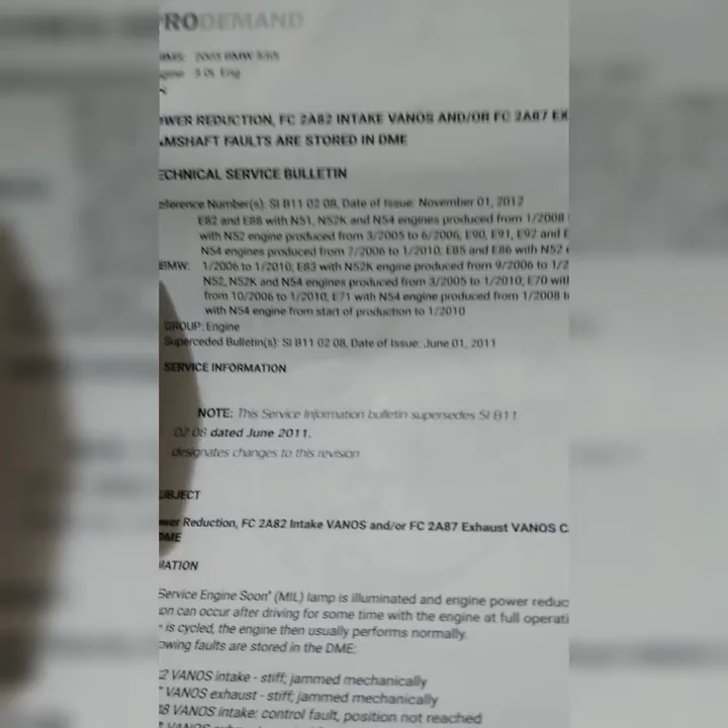My experience with this BMW 530i: basically the VANOS, I took them out, I cleaned them, and what I found was that in the middle of the diagnosis, I'm looking at the technical service bulletins and everything, and what I found was that the filter housing did not have its cartridge, the cartridge holder, thus making the VANOS turn on. I'll show you guys a technical service bulletin later. This is a technical service bulletin for this type of problem. You can see here, intake VANOS, blah blah blah.

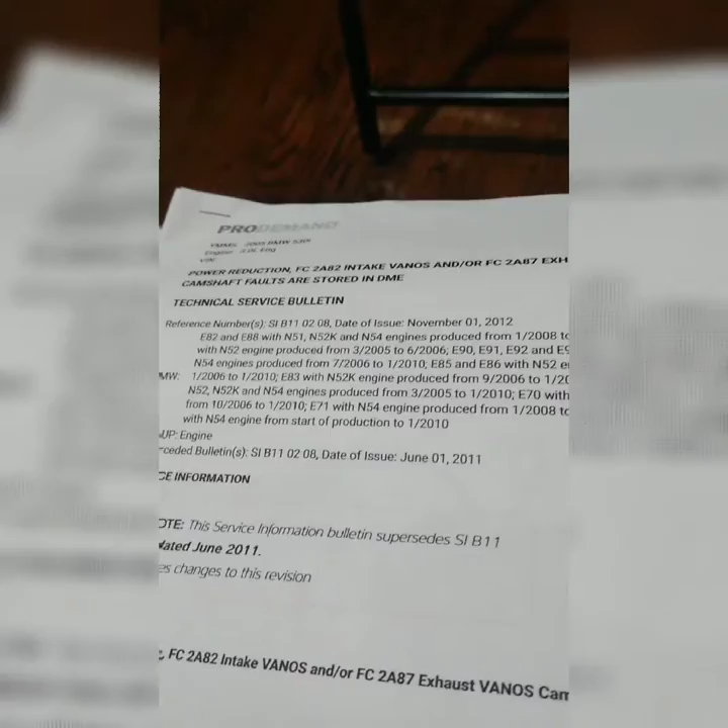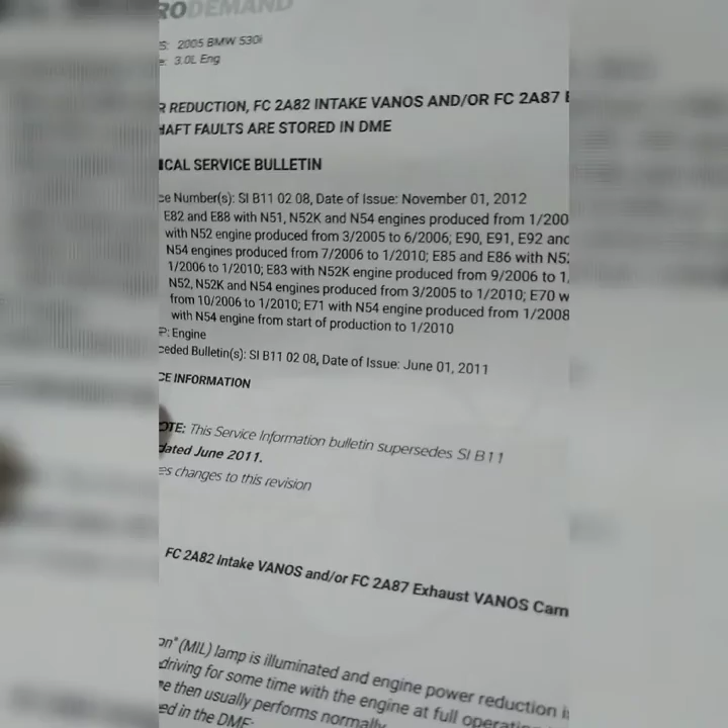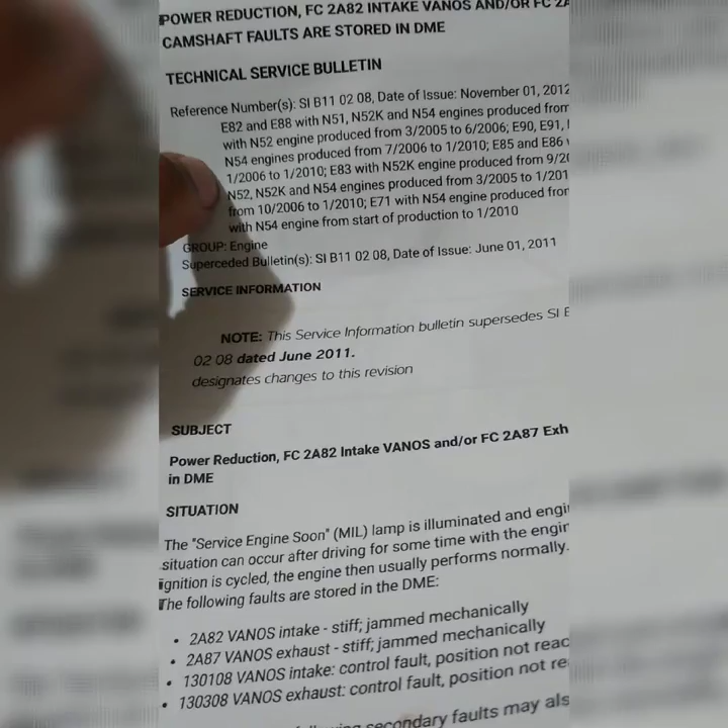So the other one I didn't print out, this one I did. I'm going to explain the other one first. The other one said, when you're looking at the VANOS solenoids, check the ohm resistances. They should be between 8 and 14 ohms. Another thing was to swap them, meaning interchange them. Make sure that you have one VANOS problem following the other. You know what I mean?

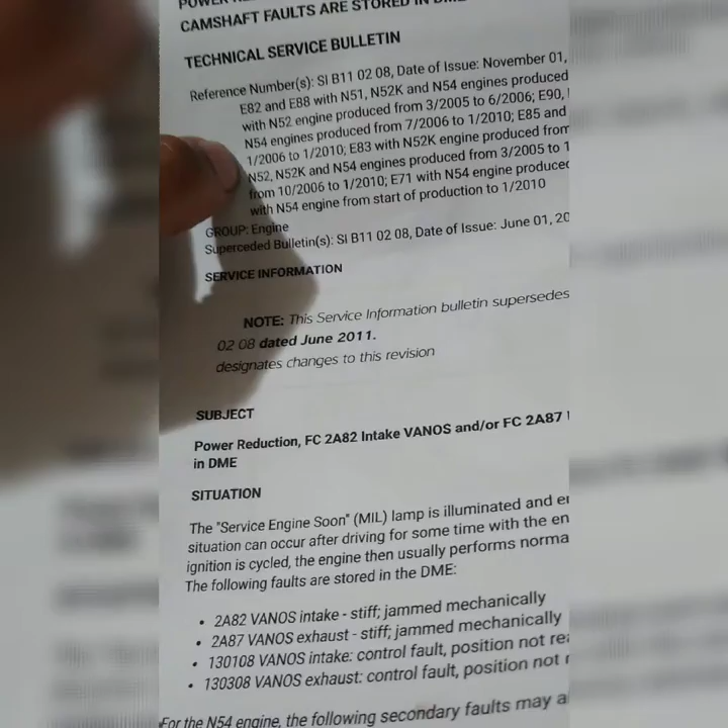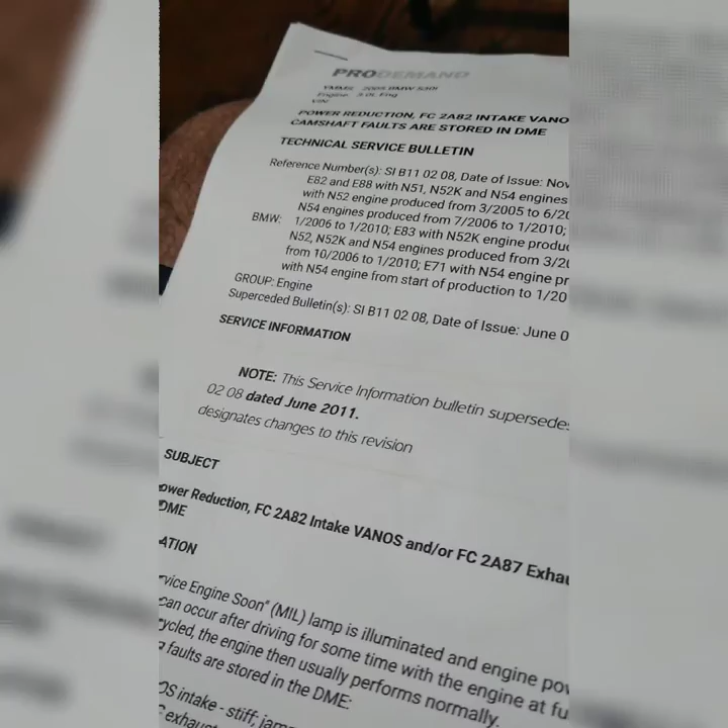So if the exhaust is giving you a problem and not the intake, we'll swap the exhaust with the intake. And now you should have a problem in the intake and not the exhaust. So swap the VANOS, and then see if the problem follows the bad VANOS. But in my case, the VANOS still stayed the same. One of the codes came up, and I'm looking at the data, and you guys saw the data already.

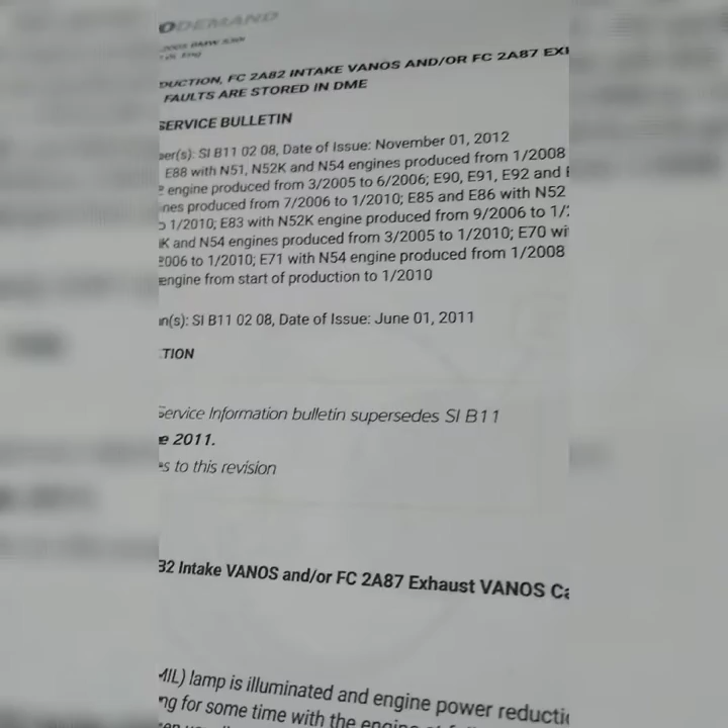One of my solenoids was at negative 115. The other one was at 80. That one was working intermittently. It would work, and all of a sudden it would just stop at 120. So I'm looking up another. I'm on my ProDemand app, scrolling through every bulletin talking about the same problem with the VANOS, right? So all of a sudden this one came up, and voila, this problem came up.

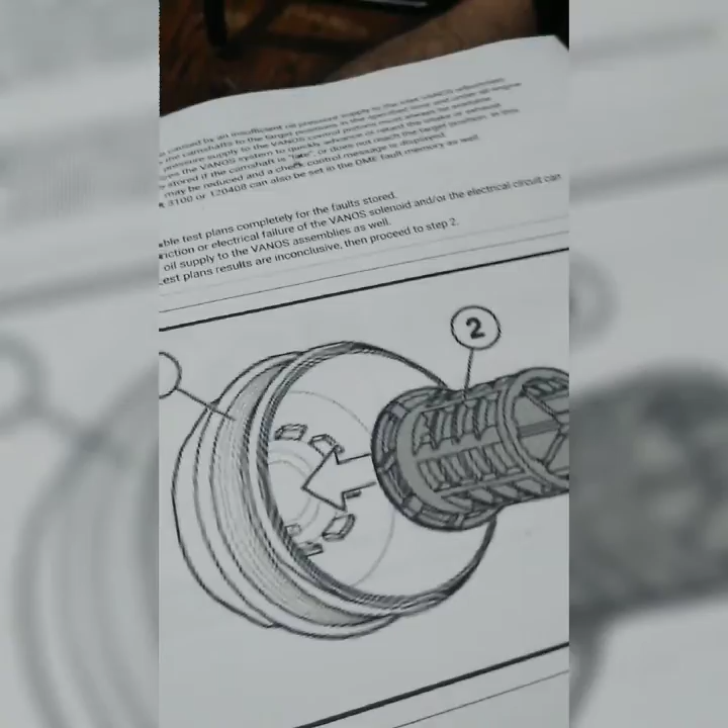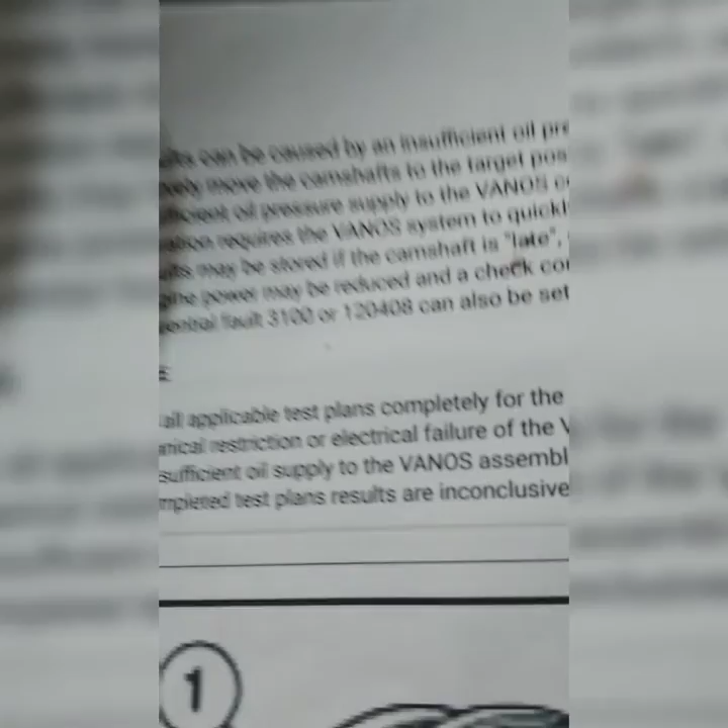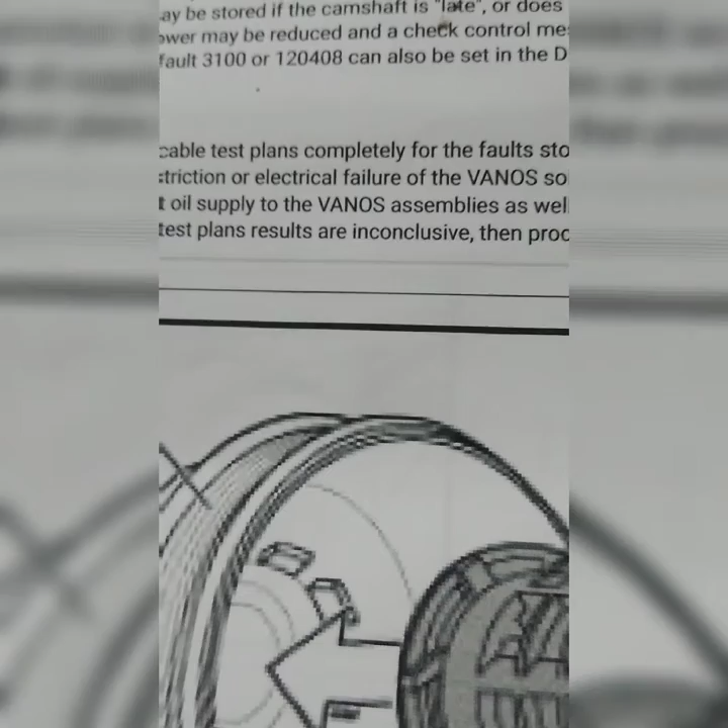Now, what does this cause? It says here that the VANOS fault can be caused by insufficient oil pressure supply to the inlet VANOS adjustment unit, blah, blah, blah. It says that a mechanical restriction or electrical failure of the VANOS solenoid and or electrical circuit can cause insufficient oil supply to the VANOS assembly as well. If completed tests are inconclusive, proceed to step 2. This is step 2 right here.

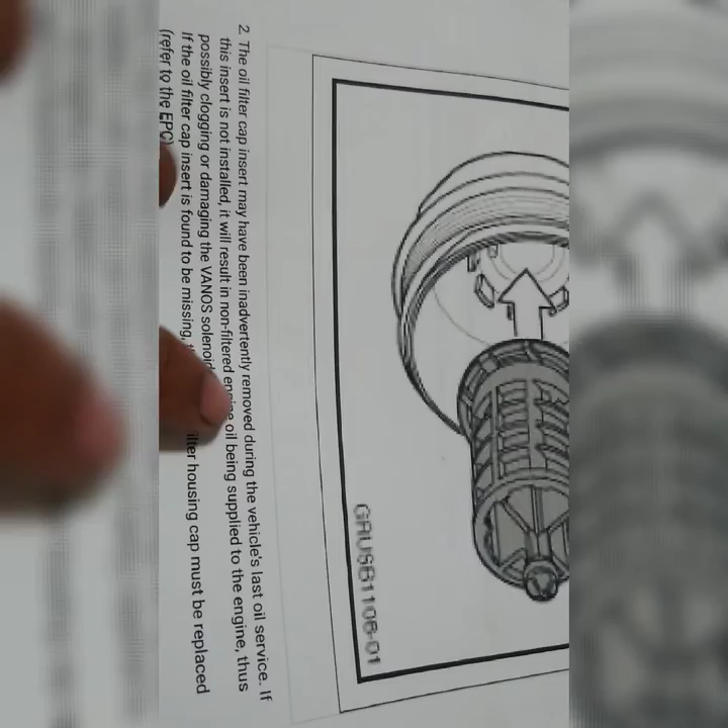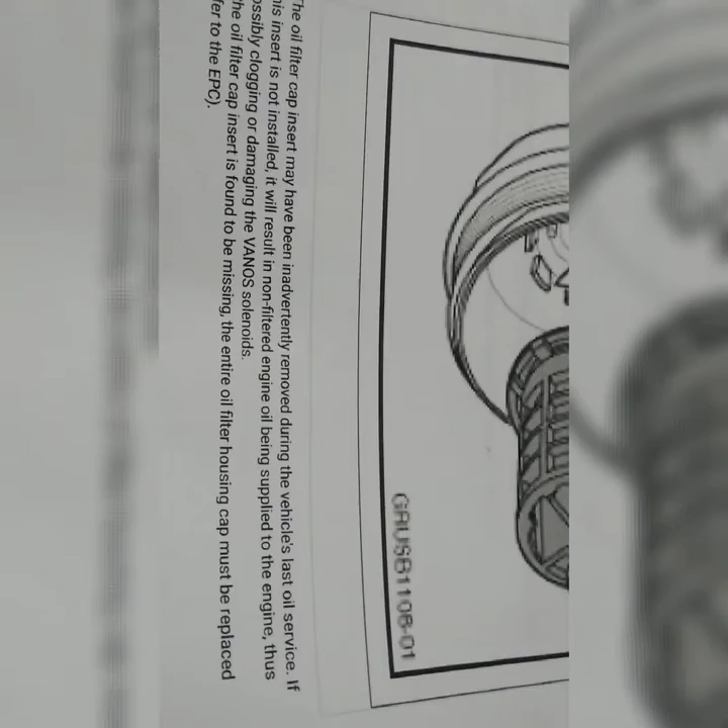Now, it says here clearly, the oil filter cap insert may be inadvertently removed during the vehicle's last oil service. If the insert is not installed, it will result in non-filtered engine oil being supplied to the engine, thus possibly clogging or damaging the VANOS solenoids. So, when I took the cap off this car, you guys obviously saw it did not have this in there.

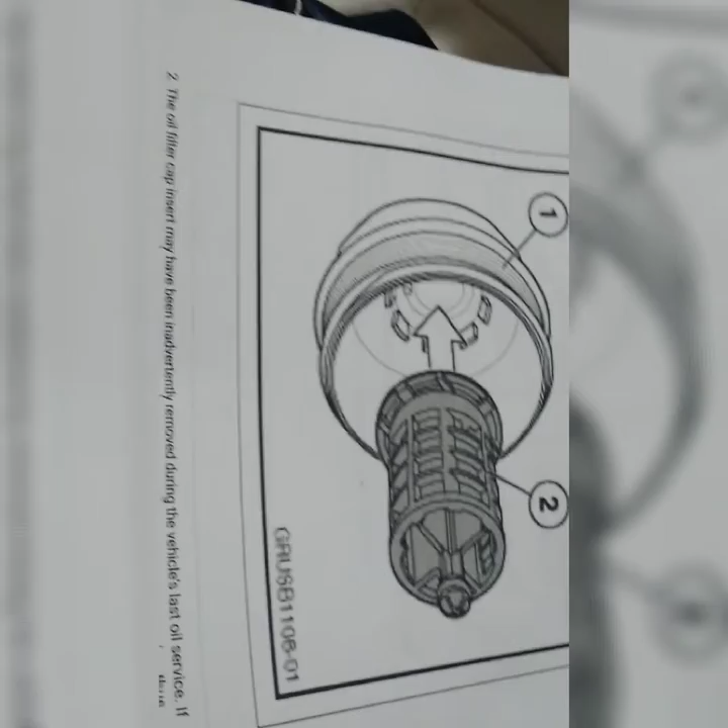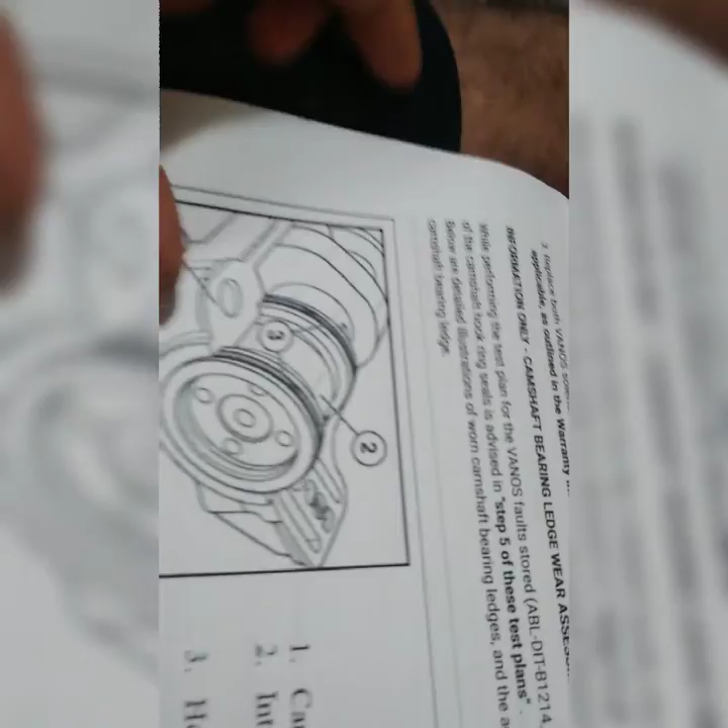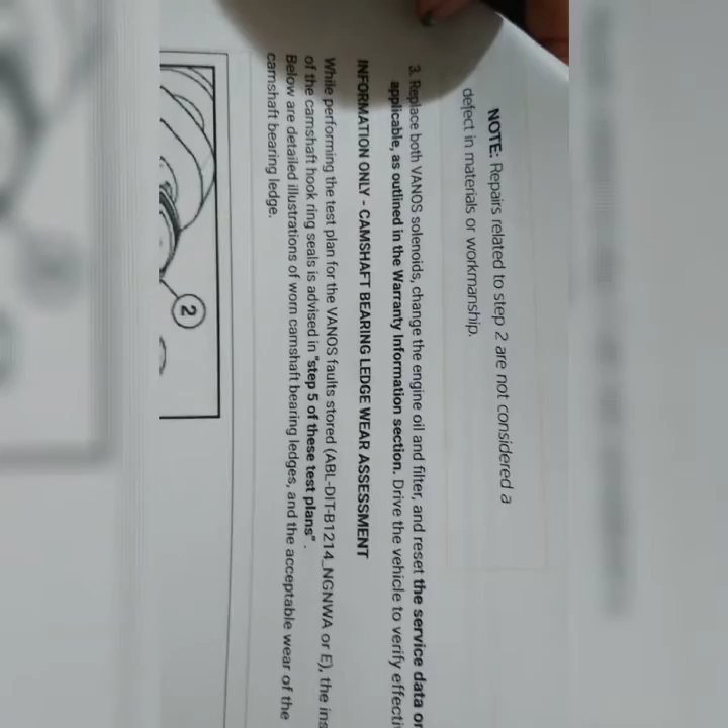So I told the guy, hey, buy a new housing cap. When you buy it, you call me. I'll install it, and we'll keep on testing it. Hopefully this will be the problem and the fix. So we'll keep going here, and you can see it says here, replace both VANOS solenoids, change engine oil and filter, reset the service data only when applicable.

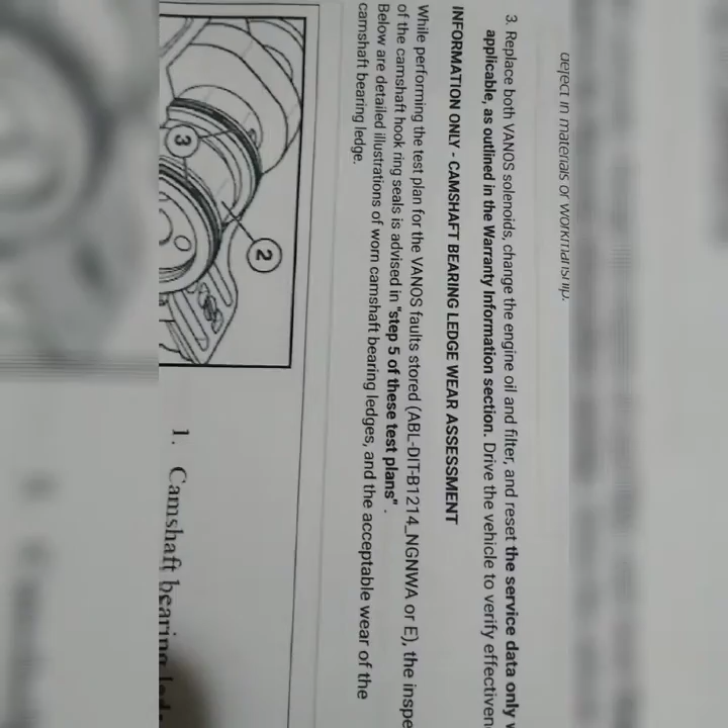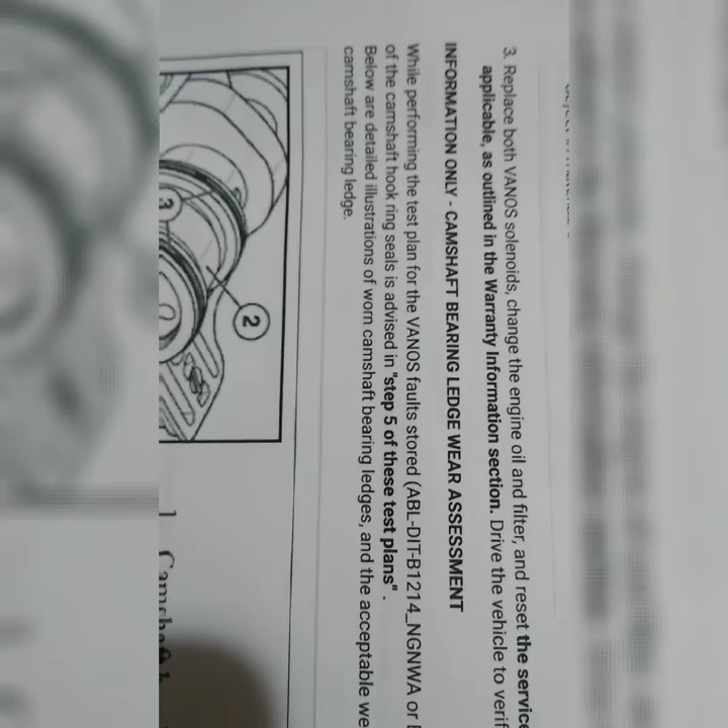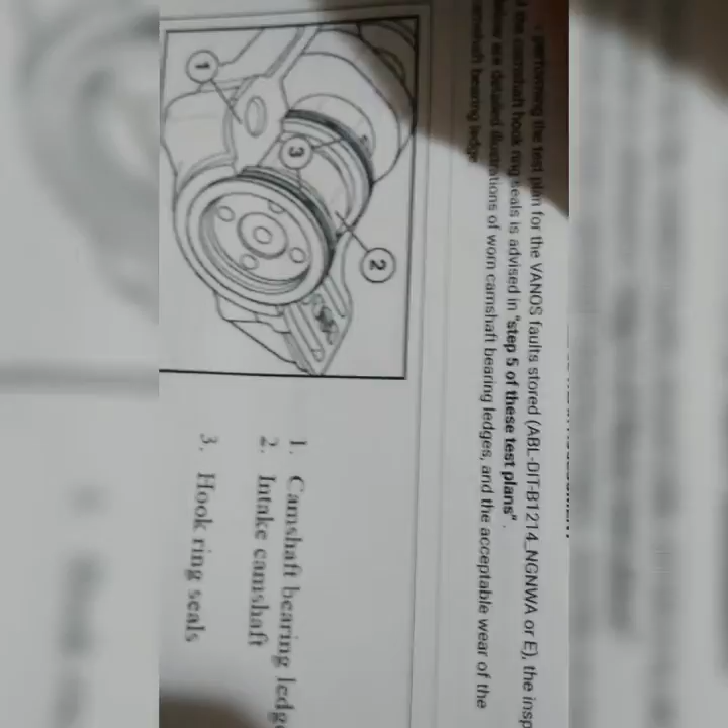So yeah, it can get pretty costly for the guy because somebody did a bad job. Somewhere, somehow, he got cheap, in the sense that instead of sending this to a BMW dealership, or at least a European technician. I'm not a European technician, I'm an all-around guy, but I know European cars. I'm not a certified BMW technician, but I understand them, I deal with them, I fix them, for these cars and for any car.

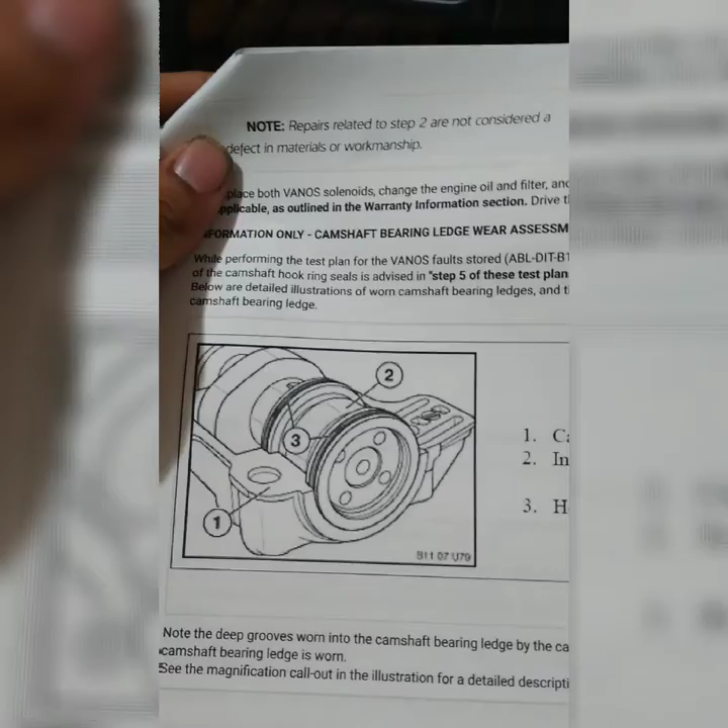ProDemand. They call it the mechanic's Bible. This is where we go to diagnose everything. In a general sense, I do use this a lot. I check oil specs, everything with the system. But I don't want to make this video too long. So, yeah, I found that this was the issue. I didn't find this insert.

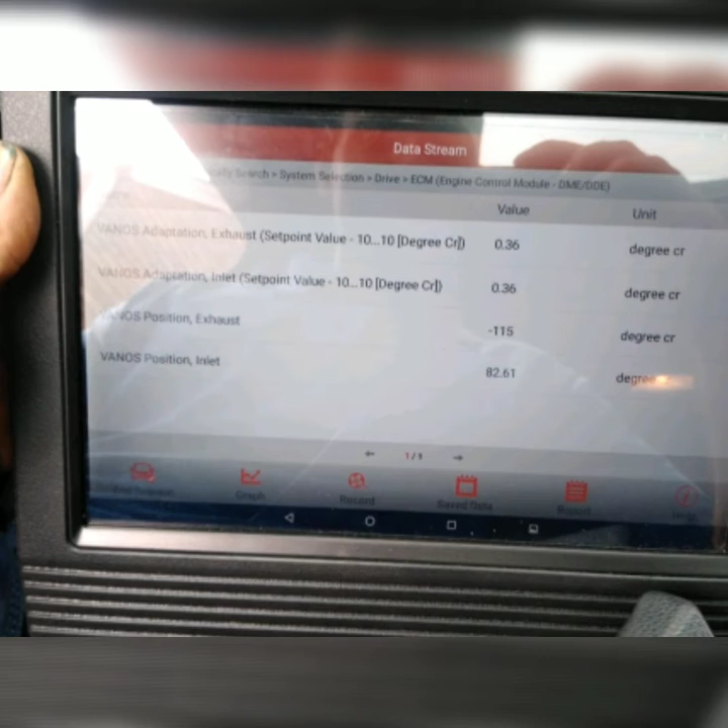So there's the filter with no insert in it. I'm going to change the oil on it, obviously. 5W30 European Performance for the BMW. You got some data: negative 115 and 82. That was sort of working in and out. Then you got the codes. So this is the result when you don't have your insert in your filter. And just remember, my fellow mechanics, don't trash that insert. Leave it inside the housing.